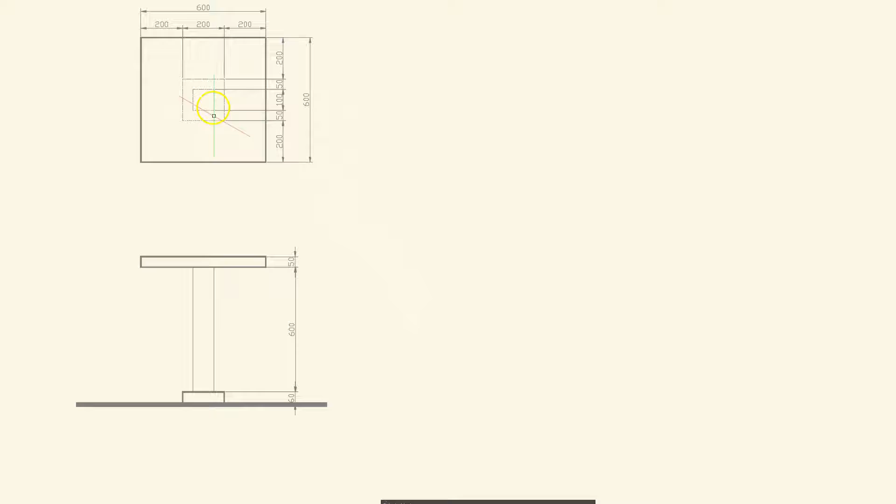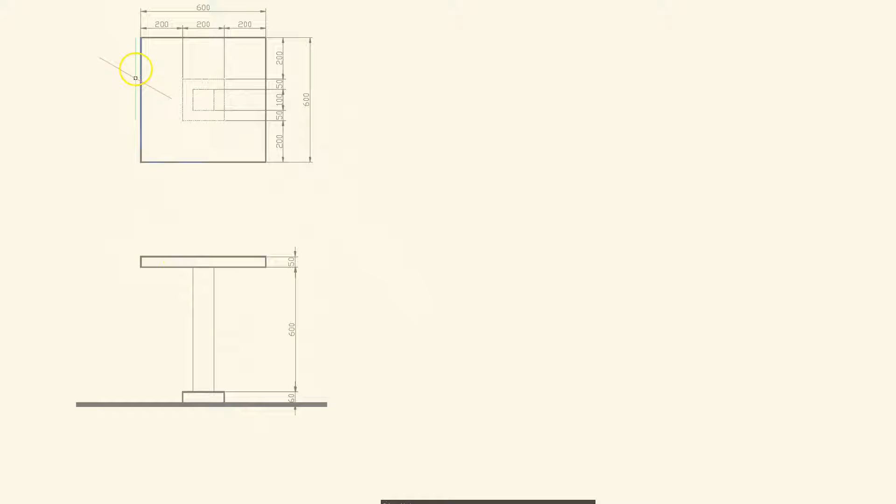We're going to do an axonometric of this garden table or small stool. On the top, it's 600 mil by 600 mil with a 50 mil thickness. The overall dimension is 600 mil, and this dimension here is 60 mil. When drawing isometric, we have to make sure that the top dimension is correct, and also that the vertical position of this column is correct.

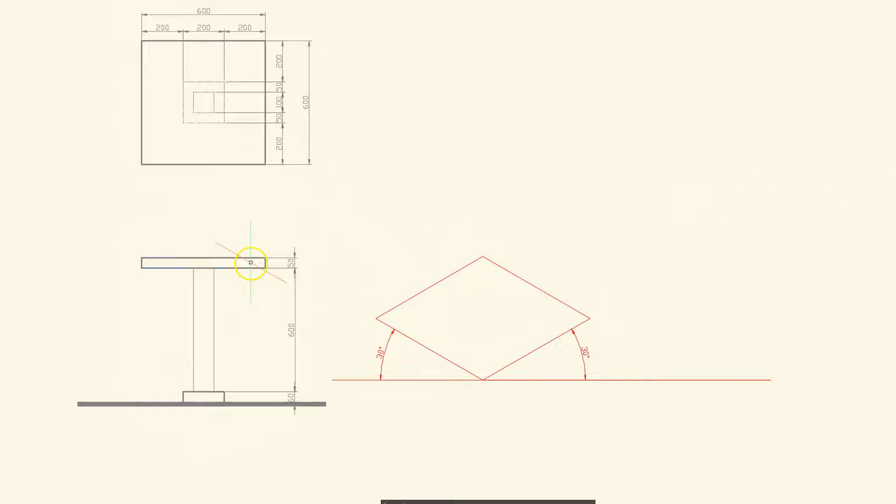The first thing we do is draw everything out at 30 degrees, 30 degrees. We draw out our plan, our overall plan, and it's a good idea to draw this out as a box around the overall object. That's usually a good strategy.

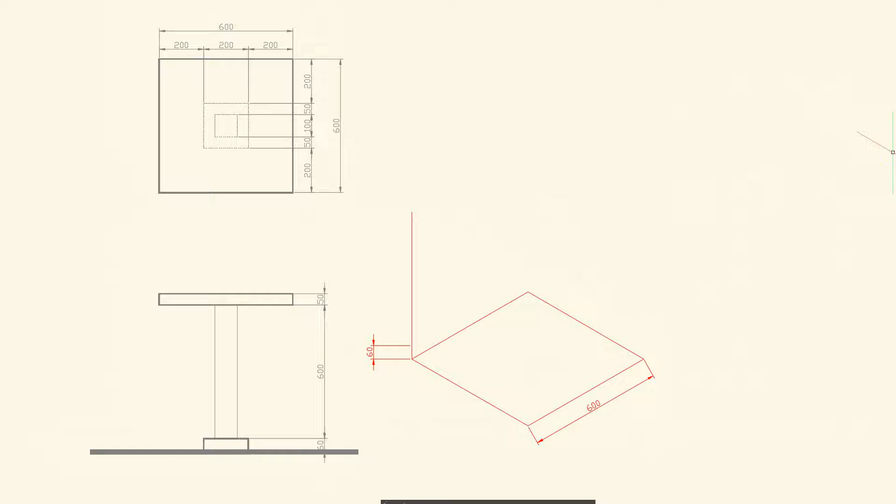So then we draw in our vertical dimensions, making sure that's 600 mil there. This piece here is this piece here, so that's at 60 mil. Then we draw our line in here, that's there, at 600 mil.

Then we draw in our top, that's 50 mil, and then we can draw in the top of our plan. What we have here is essentially a box around our entire object. That's a good way to start.

The reason we do this is that it's much easier than trying to work out the position of the column from the center here. It's also a good idea when planning out your drawing to just do some light lines, so you know your drawing is going to fit on your page.

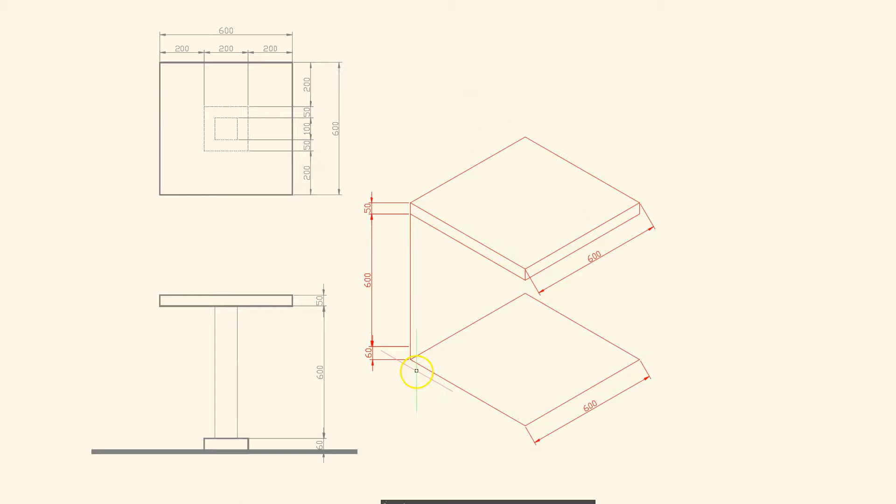So then the next thing we do is try to work out the position of this piece in relation to this piece. A good place to start is on the plan, where we draw in some light construction lines. This line here is this position here.

So we're going across 200 mil, 200 mil, and then across 50 mil. That's 50 mil there, and then we're going across 100 mil, we're going across 50 mil. Okay, they're all on the plan, that's been given to you.

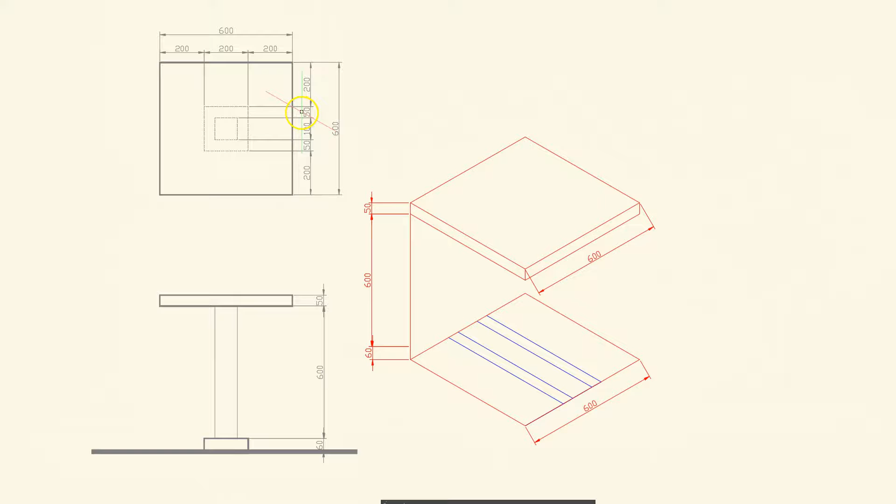And then what we would do is find its position on this length. Again, that's all given on the plan. So now we know that this point here is equivalent to this point here on our plan, and on our elevation, this point here

is this point here. So we're going to draw in that elevation, that's the 50 mil, then coming across that 200 mil and then down 50 mil. A good way to do this is to try to be as systematic as possible: 50 mil up, 200 mil across, 50 mil down. That's that 50 mil up, 200 mil across, 50 mil down.

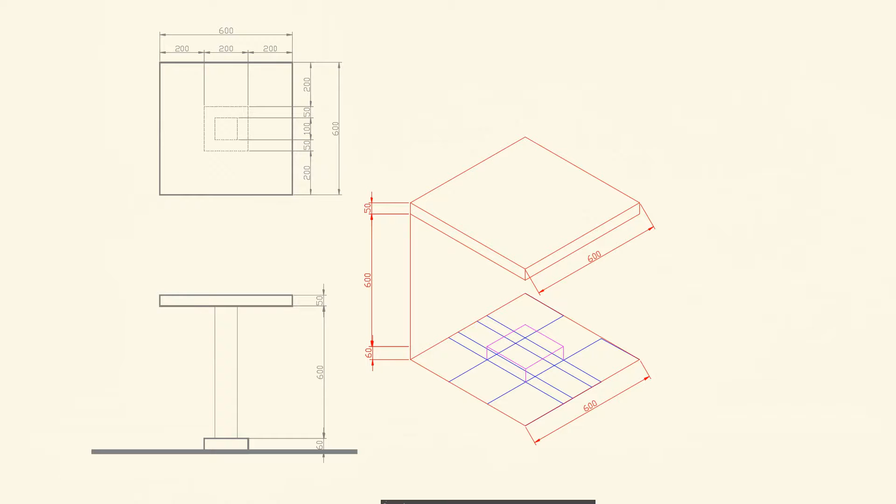Now we want to find the position of this, it's a 100 mil by 100 mil column. So I'm drawing in the final parts of this, all done as construction lines. Now I'm going to find the position of this column. I've gone 50 mil across and 50 mil in, exactly the way this is demonstrated here, 50 mil across and 50 mil in.

And then I can draw in my column, that's my column there. So now I have the position of all of the elements.

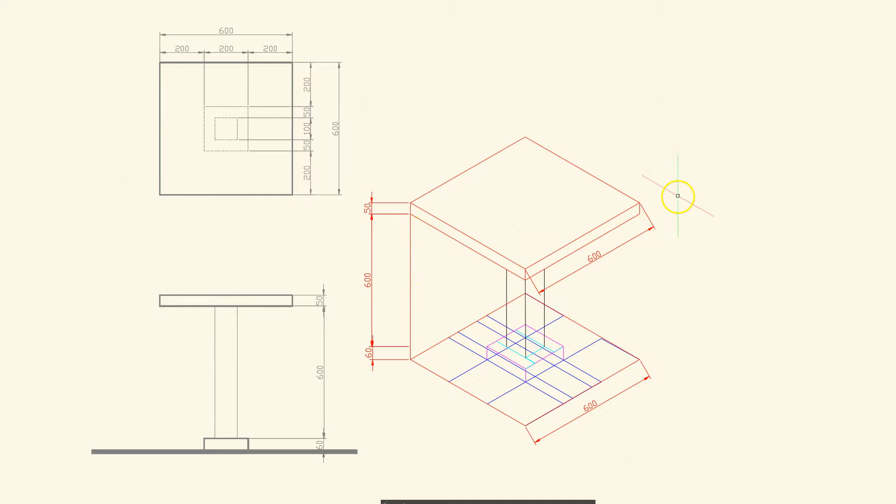Now what I would do is go across all of these and heavy up the lines, and you'd end up with something like that. Just for the purposes of clarity, I'm going to remove some of these construction lines, some of which we wouldn't actually be drawing.

In particular, the dimensions you wouldn't be drawing. You would be drawing like that initial plan line. So that's what you'll end up with — at the end you'll have construction lines going down like that grid. Leave those in, they're left in as something very light.

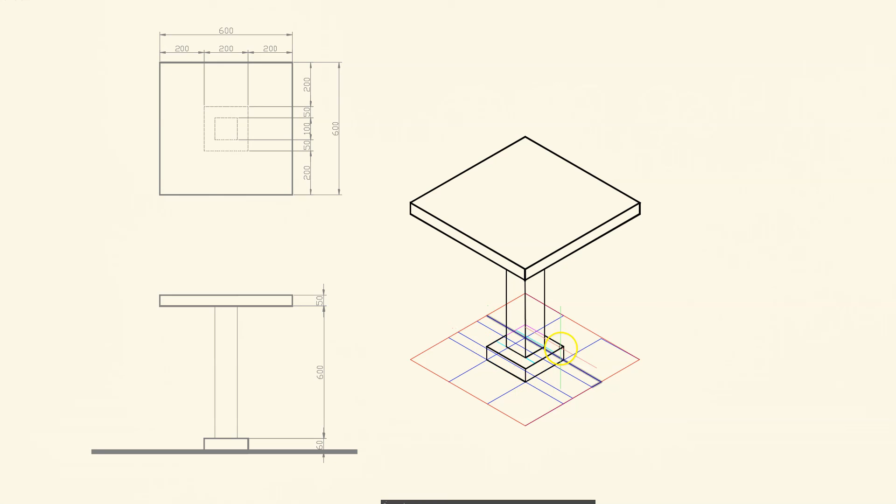They usually make the drawing look really good if they're nice and light, and then you're just going to heavy that up. You tend to heavy up lines that are closer to you, so these lines on the top would be the heaviest, the column would be a bit lighter, and then the plan objects would be a bit lighter again.